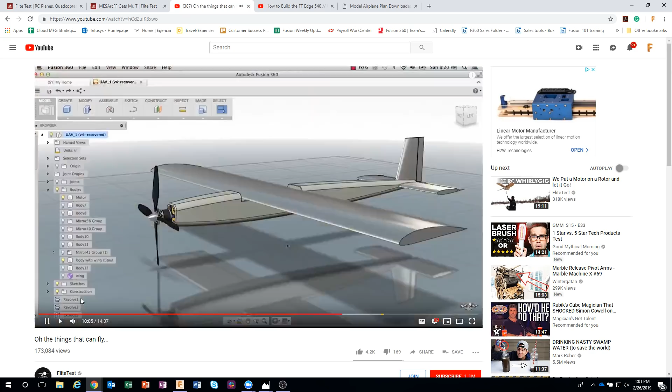I am not affiliated with FliteTest in any way, but I really do like them. I'll show a couple quick things. This is their webpage, you'll notice Flight is spelled a little differently. I've linked their webpage in the description of this video. They also use Fusion - this is Josh Bixler, and I don't know how well this is going to share, but you can see they're actually using Fusion to design some of the things and products they're creating. I think it's really cool. I've actually helped a couple of them with some of their quadcopter designs. I'm even out on one of their web pages.

I helped teach how to design stuff in CAD for one of the local high schools, and they called me Mr. T. So I'm going to scroll through here, and you can see I designed my quadcopter, which I then cut out on my CNC machine, and then flew it for them. It has FPV and a camera on it, so I was able to film their high school campus and all of the students.

Personally, I think FliteTest is a great web page, especially if you're interested in remote control stuff, because they basically try to get people involved with the cheapest amount of investment possible. In fact, a lot of their plans are made out of Dollar Tree foam board, where it basically costs $1 to cut these foam parts out.

So again, going back to this email - Bob was trying to simulate how to create these, and he sent me a link. He basically says he wants to sketch it up, fold it, print it, and then maybe make a plug out of it. I thought this was really cool, because eventually he's going to want to vacuum form a cowl. So this is what I'm hoping to show you guys today. Okay, let's dive right in.

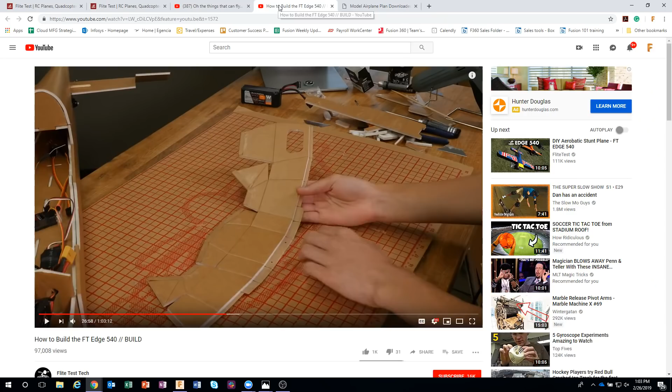If I go back to this web page, they have these build videos on how to make these, showing them cutting the part out and then folding them at certain angles. He was trying to simulate this in Fusion for his own design. You can see they're bending it and going to glue it together. Fast forwarding a bit, you can see it's going to make this particular cowl, which then slides onto the front of the airplane like so. So that's what we're going to simulate.

Okay, so I'll be honest, the first thing I wanted to do was use our sheet metal module. Unfortunately, we don't have the ability to fold along bends that you just sketch onto a sheet metal part, so I was not able to do this in sheet metal yet. I think down the road we'll see the ability to draw lines on a sheet metal part and say bend at that line. So the only thing I could think of was to actually use individual components and join them together using as-built joints. What Bob did is he got the plans and added it as a canvas.

I showed that in our last episode, episode 14, how to create a free-form handle for something like a spatula. I brought in an image, and you just go under Insert, Attached Canvas. So we did that.

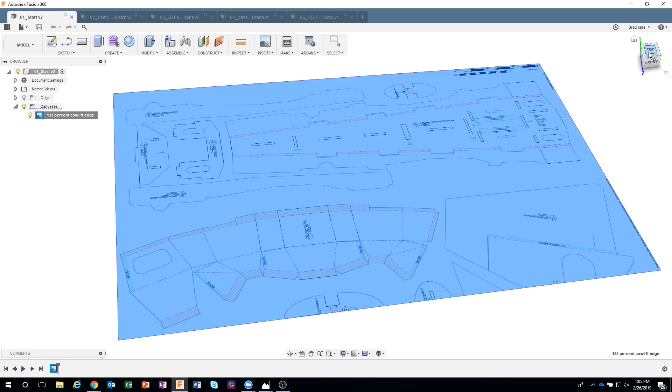Next we want to calibrate it. You'll notice in the top right of the plans there's a legend. I right-clicked on it and said Calibrate. Now all I have to do is pick two points, so I'll pick one point there and another point over here.

Now I'm going to do another shout out, this one for, I hope I'm saying the name correctly, Ayal. He said in my last live stream that when I calibrated, I just picked a small distance, and he said you'd actually be more accurate if you went from 0 to like 10 inches, or 0 to 6 inches, instead of 0 to 1 inch. You're absolutely correct, I love that kind of feedback. I was like, oh, that makes total sense.

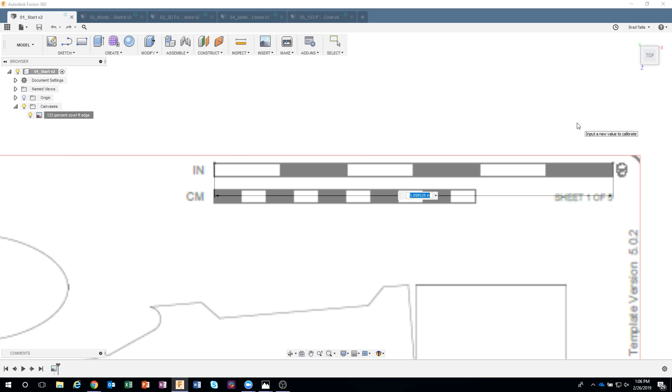So I'll do that here. I pick one point over here, another point way over here, and say that is 6 inches. You'll notice right now it says 5.8, so I'll say 6, and the image grew just slightly. Now we know we're calibrated to the right distance.

Now in this example there's a lot of repetitive stuff, so I'm going to show a couple steps and then kind of jump ahead, like the 'take the cake out of the oven' kind of shows. I'll come in here and create a sketch.

On this top face, all I need to do is zoom in and start tracing around. For example, I might start here, getting as near these intersections as I can. This is more for representation, but as I'm moving around it's saying, hey, you're parallel, automatically creating those constraints for me. I'm parallel to that other line, which is pretty cool. So I'll get near there, then come over here, just trying to get as close as I can while tracing over these plans.

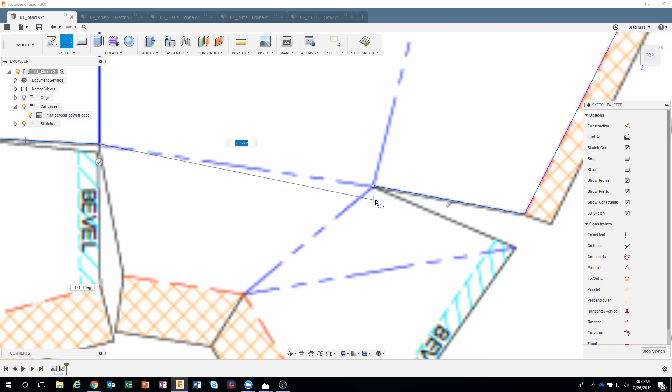So, et cetera, et cetera. I would keep going, but I'm not going to do the whole thing. I'll come down here, come over here a little bit. I recommend zooming in if you need to. The higher resolution your image is, the happier you'll be.

You can see that it filled in with this tan color, saying that's a valid profile. That's this show profile right here, and I can turn that on or off.

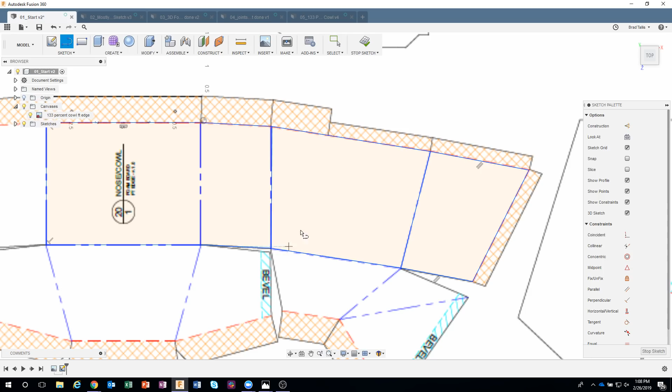The next thing I want to do is create lines that go between each of these segments. So I'll say line, and I just have to get near, and it automatically snaps to where I clicked. I'm just getting near these. The reason for that is I now have separate areas that we're going to extrude, so instead of one big solid shape, we've broken this down into a couple of quadrants, if you want to call it that.

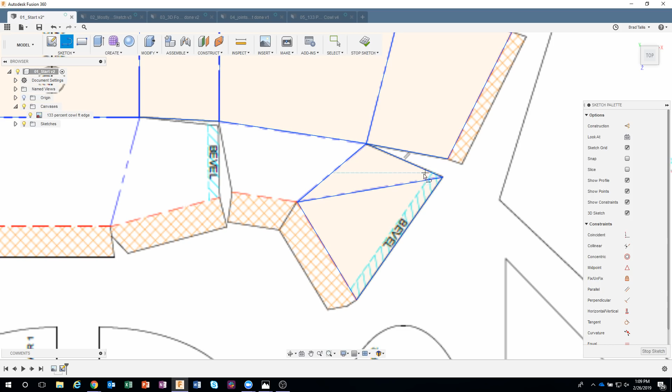Honestly, I would continue on, just keep sketching, and you can see how it catches to those areas. I'll go ahead and click, and again, I'd probably be zoomed in a little bit more, but all I have to do is trace over these areas. Now you can see I've added these two quadrants also. I would do that all the way across.

Again, to speed up time, I've kind of done that already. I've left a little area that I need to work on, so let's take a look at this. I'm going to edit this sketch and finish this up really quick.

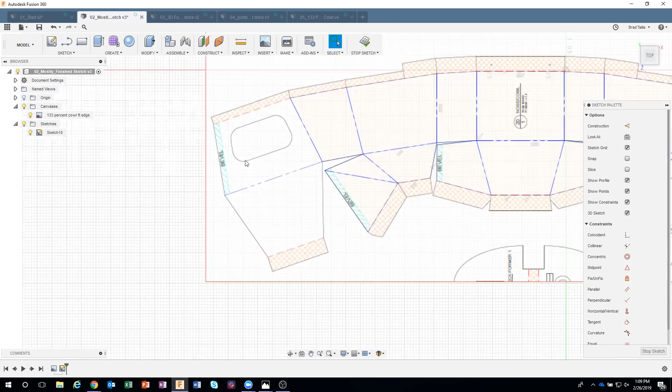I'll just grab a couple little points here, and then I'm going to show you how I'd go about doing that window that you see. So I'll go there, and finally down here. Now, here's an interesting issue that I have.

As I get near this point, you can see Fusion wanting to snap vertically, and it's not really letting me pick the point I want. That's because constraints are automatically being created. If I hold down my control key while moving, you can see it's no longer snapping to vertical. As soon as I let go, it snaps back. So if you ever want to get out of the automatic constraints, just hold down your control key.

Okay, I'll go ahead and do there, and then finally here. So how would I do this window with these curved edges and stuff like that? Well, that could be difficult. I mean, I could do arcs and all that kind of stuff, but I'm going to show you a neat little trick.

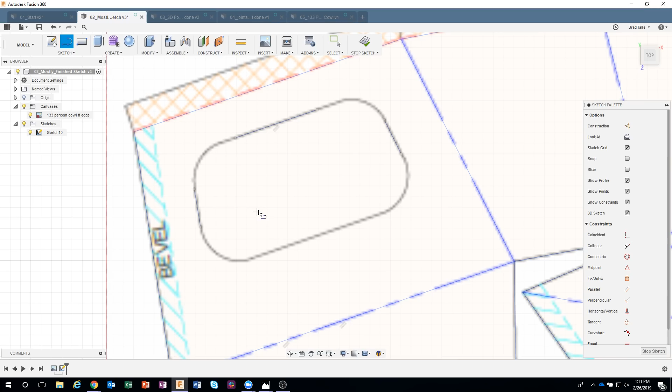I'm just going to go ahead and trace some small segments. So I'll do a line there, and I'll do a line over here somewhere, kind of like this. I'll turn off the canvas so you can see I'm just drawing a couple little line segments. So I'll do the same thing over here, tracing over the angle of this window, and then I'll finally do another one here.

And again, if I turn off my canvas, we can see what I ended up with. Now I'm going to come in here and use my extend command.

All I have to do is hover over an edge like this, and you'll see it doesn't extend all the way because it's actually lining up with other elements. But watch what happens: if I click there and then click again, you can see how it's going to the next boundary. So I'll do the same thing there. You can see how it's extending to the next boundary, which is right here.

So I can go ahead and hover over this and just do a couple quick little clicks. I notice there's a bit of a gap there, so I'll click one more time. Same thing here, I'm just going to extend these in real quick, like so. If I turn my canvas back on, we can see I now have this sharp cornered window.

And I'll go ahead and do a fillet. Now, in one of my previous live streams, I said don't use the fillet command in Sketch, use it in 3D. I could definitely do that in this case, but I am going to do a 2D fillet in this example, just because I'm probably not going to come back and change the radius of this, but I do want to show you that you can do it in 3D or in 2D.

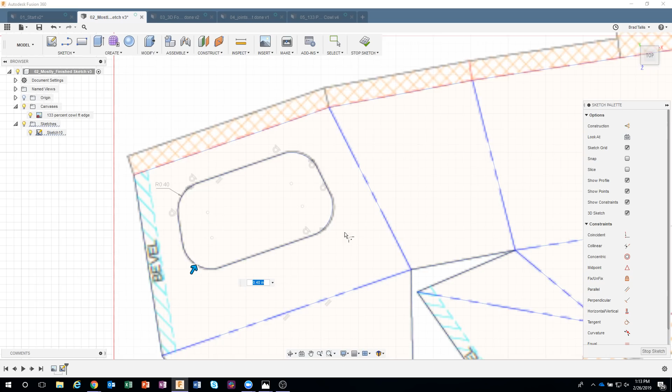And there we go. Okay, so I've now sketched all of these different areas. If I were to turn off my canvas, we can see... oops, I didn't do that last 0.4. Let me go here, say okay. So you can see we have all these different areas. And I'm going to say stop sketch.

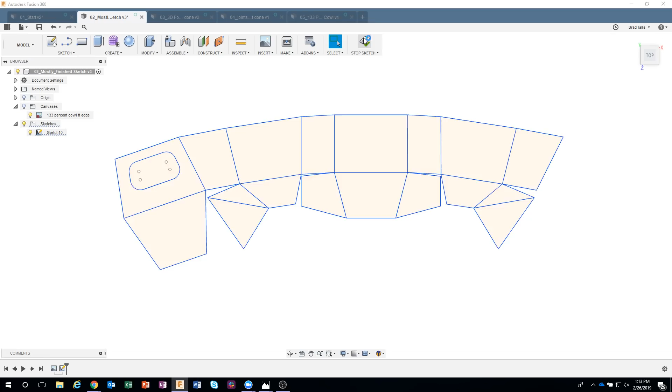Now, FliteTest uses Dollar Tree foam board, which happens to be 3/16 of an inch thick. And what I'm going to want to do is actually extrude all of these regions individually, so they're going to be individual components. So I'd have to type in 3/16 multiple times.

So this is where your parameters really come into play. I'm going to say change parameters, and I'm going to create a user parameter. We could even call it foam. It's in inches, and I want it to be 3/16.

Now, I always want it to extrude away from me, so I'm actually going to say minus 3/16, and you'll notice it figures out the value for me automatically. But basically what we're doing is creating a variable called foam, and it's going to be 3/16 of an inch thick.

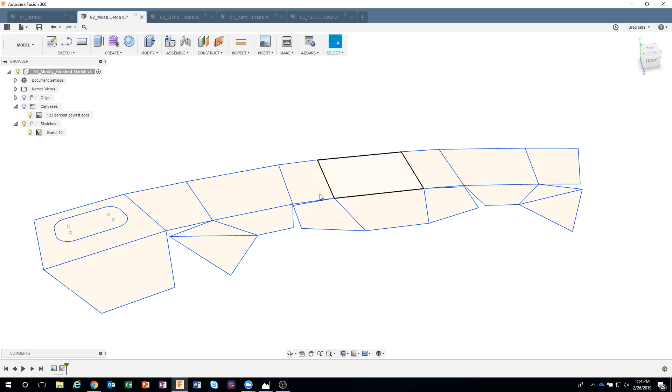So check this out. Now I can come in here and say new component. Now, why am I doing a component? Well, all of these parts are going to interact with themselves or with other parts, so I want to use the joint command, or in fact the as-built joint command, and these require them to be components. So we're going to say new component, and I'm just going to call this foam part, and I'll say okay, and I now have a component called foam part.

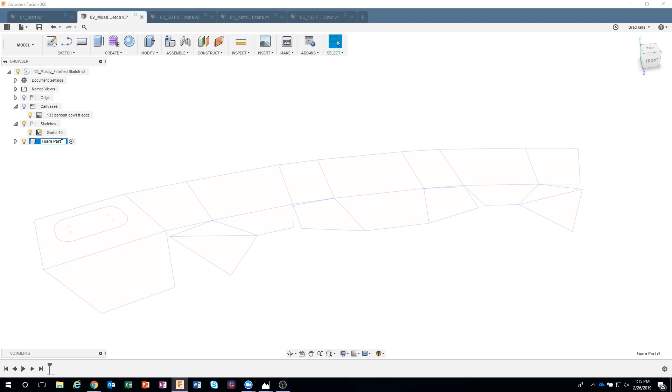Now what's going to happen is all of my parts are going to come under here. In fact, I'm going to rename that to make even more sense. I'm going to say foam part assembly. Let's do that. Okay, so now I can come in here and say extrude.

How far do I want to extrude? I want to extrude whatever the distance foam is. So you can see how I start to type in foam and it finds a user parameter called foam. And when I do that, you can see that it actually extrudes in the negative direction the thickness of foam.

What's really cool about this is, let's say you don't use Dollar Tree foam board, you actually went to Walmart or someplace like that and bought some foam from Hobby Lobby or Walmart, and maybe it's not 3/16, maybe it's like 4 millimeters or slightly different. You could just go in and change that variable and all of your parts will change thickness, and you don't have to go back and edit every single one. So that's another positive reason why you might want to use a parameter.

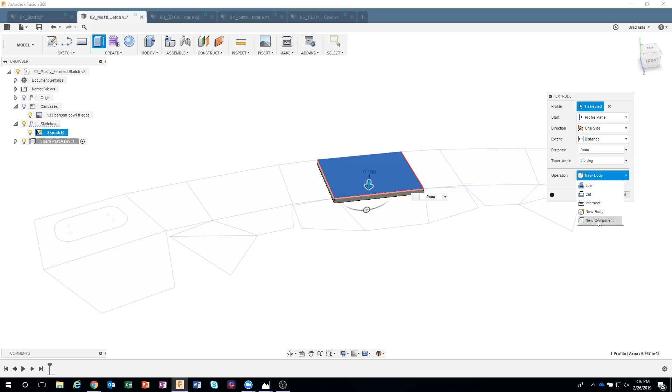Okay, now the key thing is I want to make sure I'm saying new component every time I do this. So I'm going to say new component and I'll say OK. Now you'll see a couple things happen. If I expand open my foam part assembly, there's our first component. You also notice that my sketch went away, but all I have to do is just turn it back on.

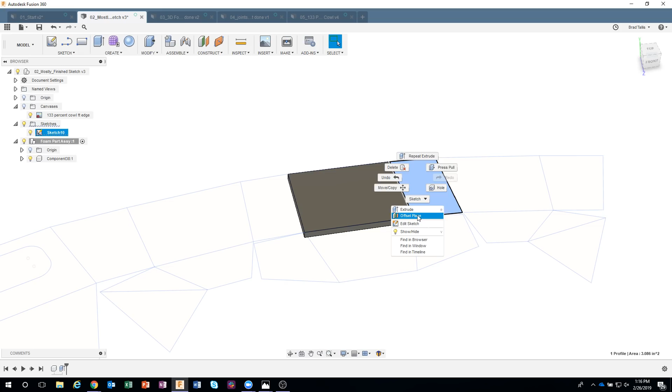Okay, so then I'm going to do the exact same thing. I'm going to right click, extrude, how far. I don't even have to type in foam. I can actually just hit this little down arrow and it remembers all of my previously entered numbers that I've done. So I'm going to say foam, new component.

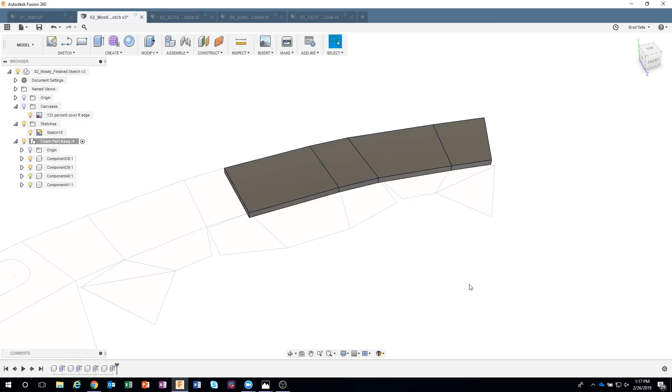I'm going to repeat my last command just by dragging straight up. How far? I'll say foam, new component. Again, kind of repetitive—I'm having to do this over and over again, but you'll notice it's creating these individual components. So distance and new component. I'll just keep working along, and I'll do maybe 2 or 3 more here, then jump ahead.

There's no way I can just select all of these. I could do maybe a couple of them, but I want them to be separate components because we're going to be rotating each one individually. So that's why I have to make these individual.

And then finally, I could do maybe this one over here, but let's go ahead and jump ahead. In fact, that's what I did—I'll go ahead and turn off my canvas. I've extruded a whole bunch of these, and we can see all the individual components in here.

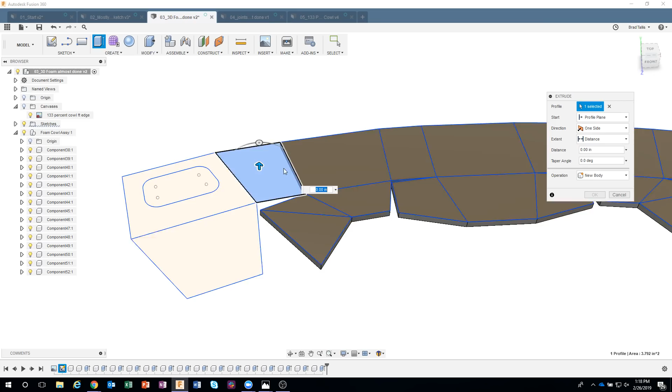Okay, so I'll just do these last 3 really quick. I'll say extrude, how far, foam, and again I want to make sure I say new component. Let me turn on my sketch.

And hopefully you know this trick—if you right mouse click, you see the marking menu and you can see this blue radar kind of moving around, and this black line. This is what we call a gesture. Basically, if I drag straight up, it's going to repeat the last command. If I were to drag to the left, it would undo. If I were to drag down, it would go into my sketch menu, etc. So all I'm doing is right-clicking and dragging straight up, and it's repeating my last command.

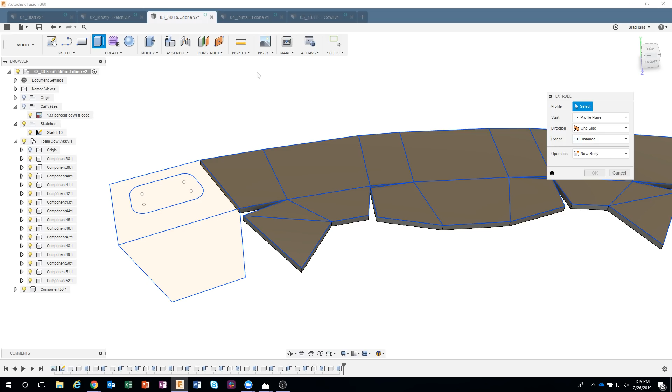Okay, so kind of a neat shortcut. I'll say new component, I'll say OK, and then finally I'll repeat one more time, and I'm going to select this outer region—you'll see it leaves the window there. We'll come in and say foam and new component.

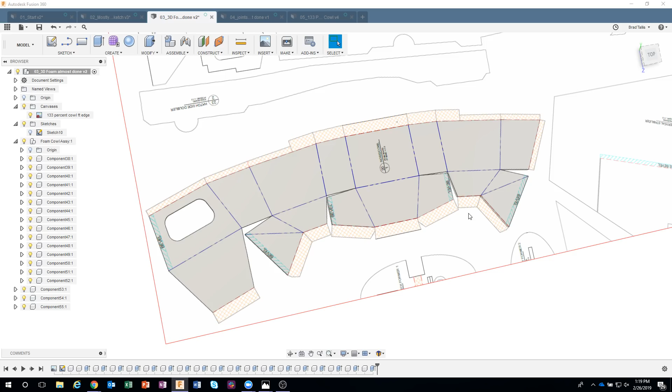Okay, so I've basically recreated what it would look like if I were to cut this out of their plans. Now, this shaded area here, this is a paper that they fold over to kind of seal the edge. We're not going to worry about any of that in this example because we just want the basic shape—I'm not going to worry about the paper part of it. Now that I have this, I want to simulate how it would fold together. And because these are components, I can use as-built joints.

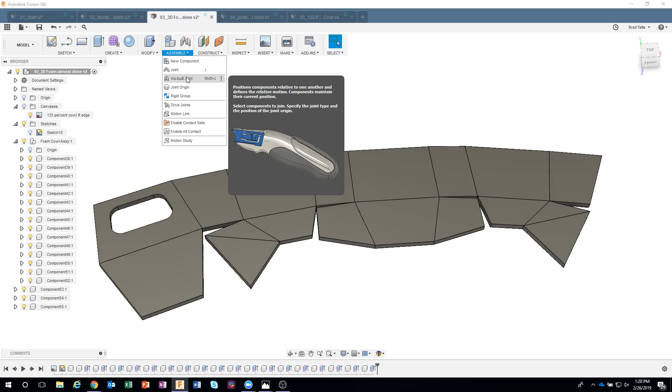Because the as-built joint allows you to take components that are already where they need to be and create a joint with them. However, the first thing we need to do is pick one of these pieces of foam that's going to be stationary. I'm going to say this is basically the bottom of the whole cowl. So I select on it, and it tells me it's this component here.

I'm going to right mouse click and say ground. You'll notice it puts the little tiny pin icon. That means I can't physically drag on this, where I can move these other ones because they're all separate components. I cannot move this one because I've grounded it. It's stationary, it's what's held in our hand or glued to the table or whatever.

So now what I want to do is create as-built joints. I'm going to come in here and say as-built joint. And what are the two components? I'm going to say this guy and this guy.

Now I want them to be able to revolve, so I'm going to say revolute. In this case, I'm going to actually pick the bottom of this edge, and I'll show you why here in just a moment. So I'm going to hover over this edge, and you see this little flag.

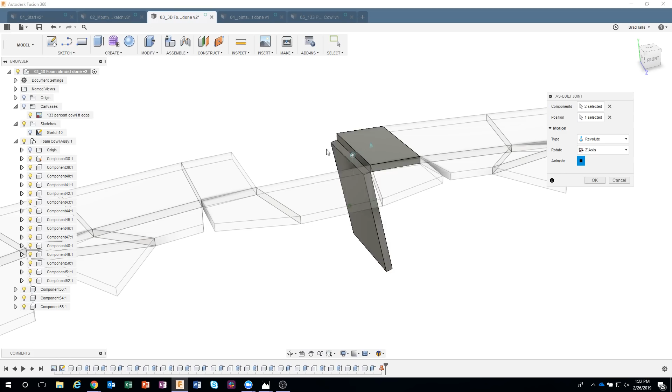Now, if I hover over faces, the flag is planar to that face. But if I hover over the edge, you can kind of see how the flag is basically rotating around that edge. So I'm just going to click there, and we can see how that would rotate. Again, it's not the best example because we've grounded this part, but it was kind of the order that I picked it. But you can see how it's going to revolve around that edge.

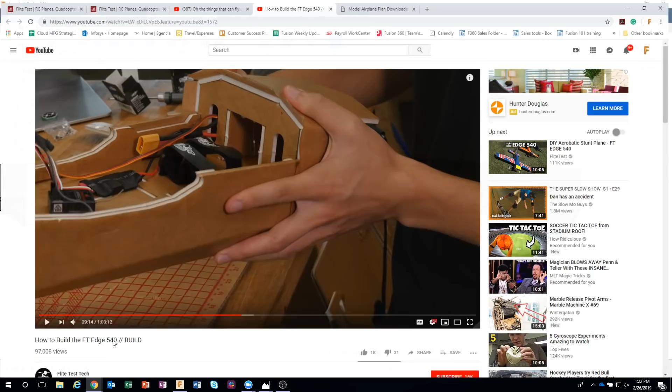Now, the reason I picked this bottom edge is because they're basically crushing the foam. It's kind of hard to explain, but if you watch the video, they're actually coming in and scoring the foam, and that kind of crushes it and allows it to fold in on itself. So we're sort of simulating that in this example.

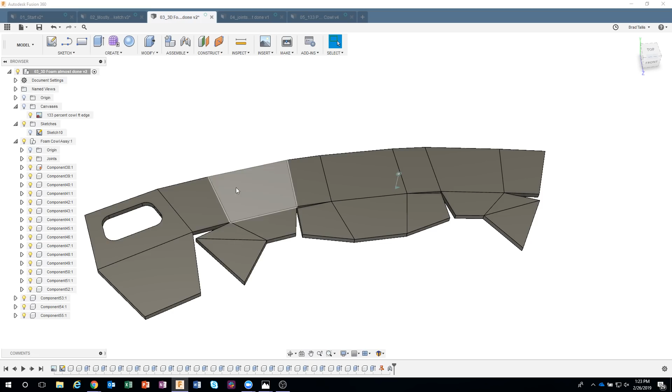Now, I glanced over at the chat. I see a lot of messages, and somebody said some of these parts are the exact mirror—couldn't you have just drawn half of them and mirrored them across? Actually, a very good observation. I tried that at first, and believe it or not, it is not an exact mirror. They look like they are, but when I went to fold it together, it didn't quite fold correctly. So I ended up tracing over the whole thing. But in a situation where it is symmetrical, absolutely, I would have only drawn maybe this whole section over here and then mirrored it over to here and then maybe added this last section. So yes, great observation.

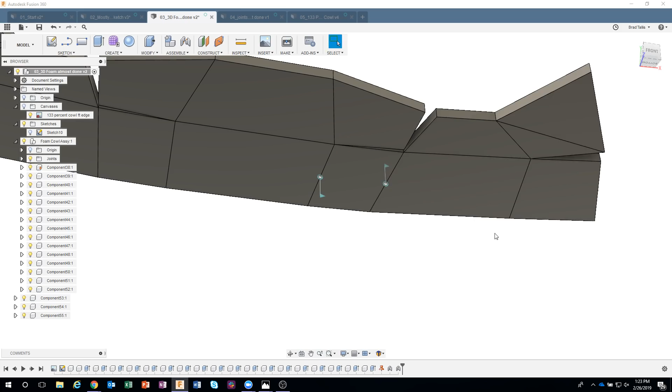Okay, so I just created a revolute joint right there, and basically we're just going to do that over and over again. So I'm going to say as-built joint here and here, and I'll pick this bottom edge. Say okay, and I'm just going to keep working along, picking the exact same edges. So I've done these guys. Let's do maybe this guy and this guy, and I'm going to revolve around this edge. I'll do just a couple more.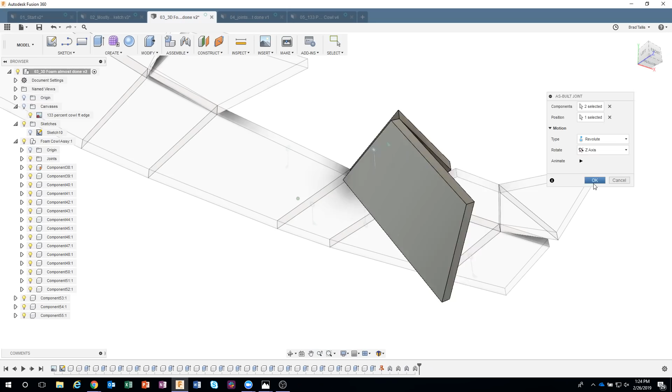Again, hopefully it makes sense why I'm picking the bottom, because we're basically going to crush the foam. So I'm just going to do that guy, say okay. And then I'll do these so you can kind of see how they interact with each other. It's kind of cool. I'll do that guy, and then finally I'll do this guy here.

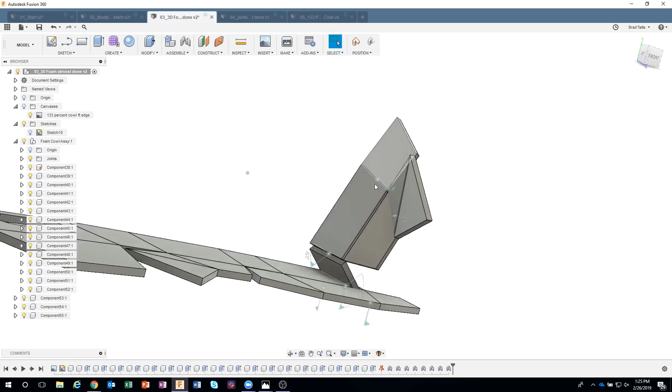And again, I would do that all the way across. But this allows us to grab that guy there, and you can see how we can change the angle of this. Now we're going to be much more precise—we're going to actually type in our angles. But you can kind of see how these all interact with each other. If I grab that one, it's trying to do all of them. So I apologize, but we're basically going to come in and fold this.

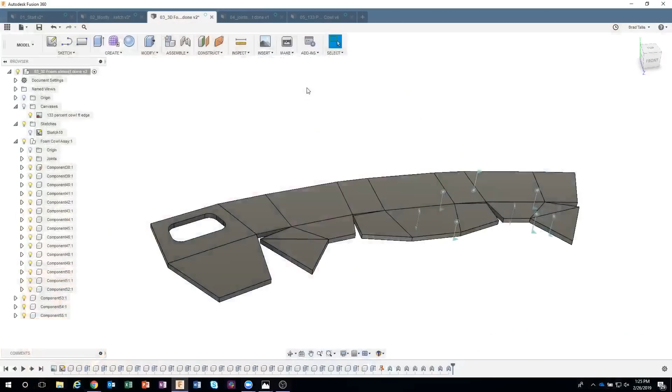I'm doing the cake in the oven here, showing a couple steps and then jumping ahead. I've already done a bunch of those steps because I don't want you to just sit here and watch me click 20 or 30 times repeating the same command. So no magic or smoke and mirrors here. Let me see how far I can go, I'll do this one. Let me just finish this up really quick.

As-built joints, I need to do these guys. Let me rotate so I can make sure I'm grabbing the correct edge. Bear with me... okay, this guy and this guy.

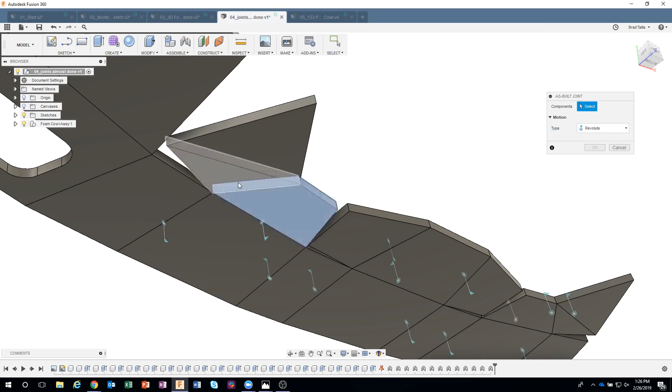Now you might notice some of the flags are pointing up and some are pointing down. It really depends on which edge I'm selecting, and it doesn't matter if it's pointing up or down, but when you start typing in some of the dimensions, it's going to go positive or negative. That's kind of what the flags are showing.

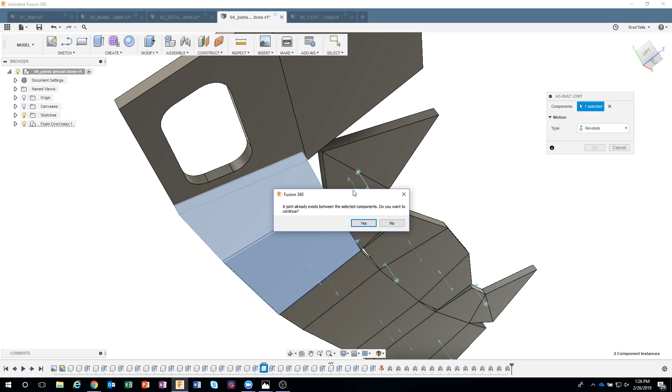I already had a joint there, so let me... yep, there it is. This guy and this guy, and then finally this and this. Okay, so there we go, I've added joints on all of those components, so you can kind of see all of those components. I would go ahead and save, obviously, because I've just done a bunch of stuff.

But now what's kind of cool is I can come in and use the drive joints command. Remember, this guy is grounded right here, we can't move him, but the other ones we can. So I'm going to come in and say drive joints, select on this joint right here, and when I start to drag you can see how it's going to move all of those parts at the same time, which is kind of handy.

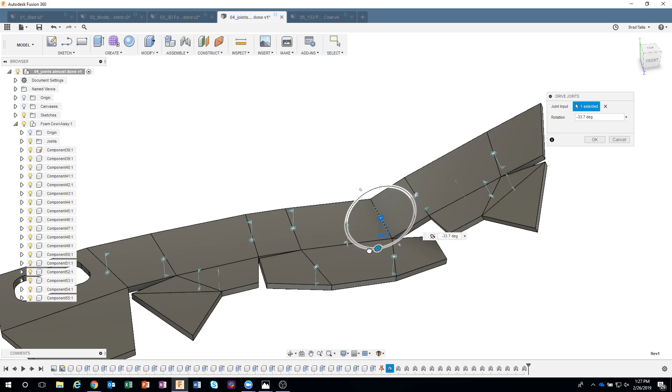Which is pretty much how building the foam part works. So I'm going to come in here and say minus 30 in this case, and I'll do the exact same thing over here, rotate this guy, and it needs to go 30. Again, I'm getting these numbers from the actual assemble video - he talks about how to bend these and what angle to bend them at.

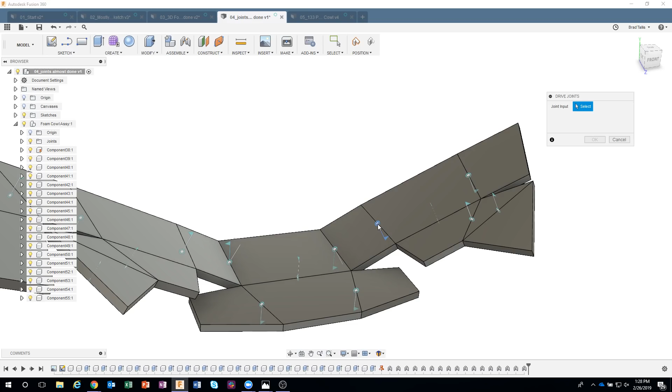So again, I'll do drive joints, I'll grab this guy, and it needs to go 60 degrees. You can kind of see I could rotate dynamically, drag, and see it sort of snap from just random numbers to like 45 there, and I'll keep going and it's going to snap to 60 for me. Or I could type it in.

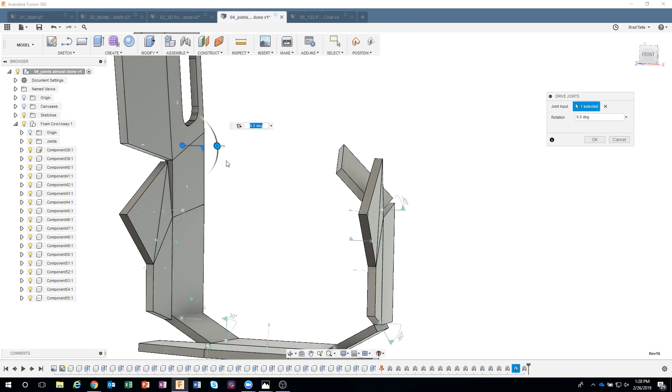So I'll do the same thing over here, we'll say 60. And I'm just going to kind of keep going along. I think this one here is 45, so I'm going to say minus 45. And this guy here - oops, wrong one, let me do that guy there - is 45.

And then finally this one here, I'll go ahead and rotate, and you can kind of see how we can visually see how these are all going to interact with each other. So I can see, probably around, let's try minus 45 - that's a little bit far or whatever, but that's okay, I'm going to leave it the way it is. And I might have to come in and edit this guy, so I'll double click on him and I can rotate this down if need be.

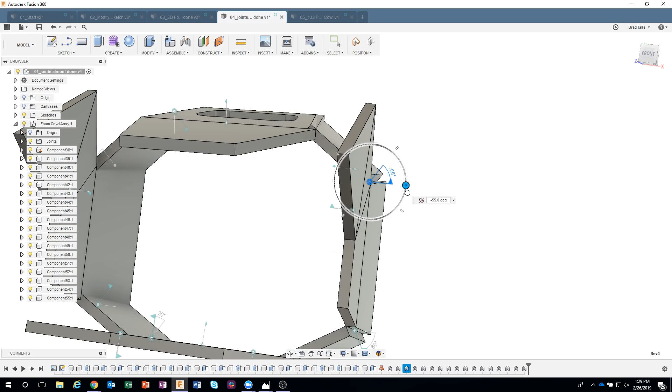Now again, you're going to see that some of these parts intersect, and that's because they bevel the edge. In fact, if I turn on my canvas, you'll see some of these are marked bevel and all kind of stuff. I'm not going to go into that much detail because that would just take a lot of time, and it's not necessary for what we're trying to do.

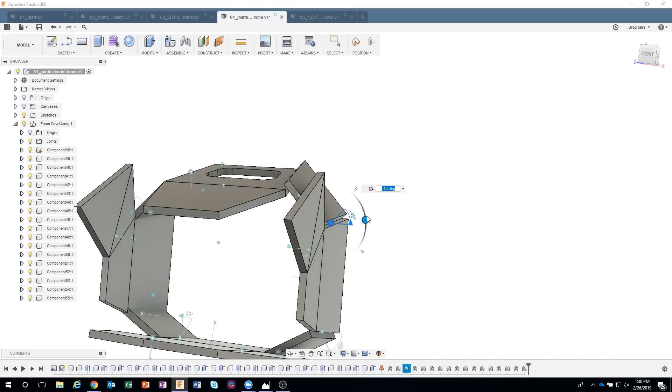I'm not going to spoil the thunder here, but we're actually going to assemble this and then use this to create an organic cowling that we could 3D print or injection mold or something like that. Now, if I wanted to, I could maybe subtract these from each other to get that final shape, but I'm not going to in this case.

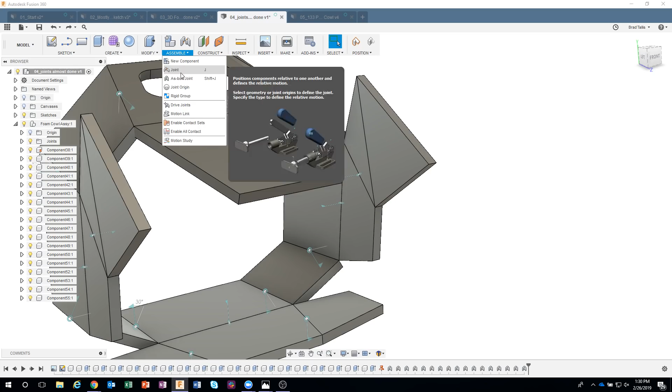Oops, I did not mean to do that. Okay, so let's go ahead and continue on with some of these other ones. Sorry, I didn't mean to redo my undo. I'm going to come in here and say drive joints, we'll grab this guy here, and let's rotate about 45 degrees in this case.

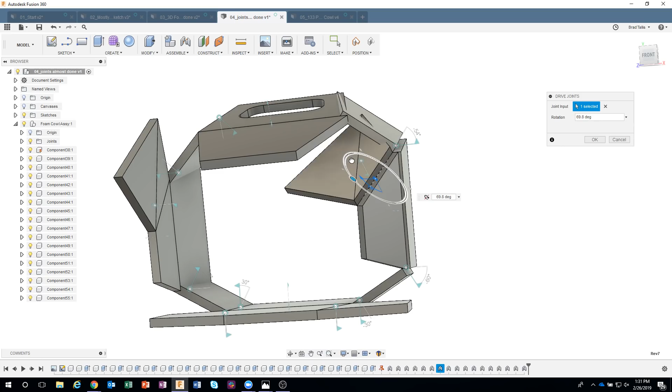And this guy here, I don't know all of these numbers, but I think maybe it's 30 and all that kind of stuff. So I'm having to play a little bit. Let's come in here and change that to come back a little bit, so you can kind of see how these all line up with each other. I'm just going to do a couple more and then we'll jump ahead.

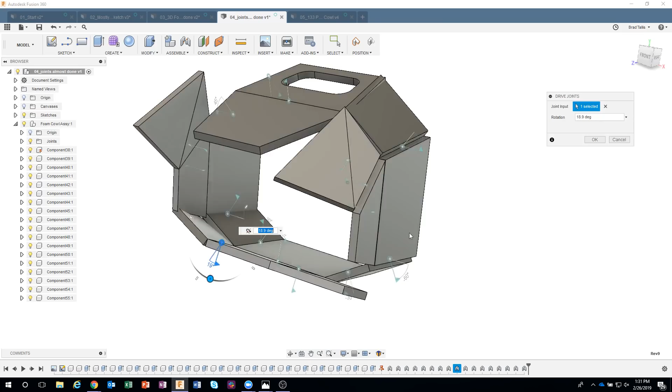So I'll come in here and say drive joints. Let's do maybe this guy here and make that 15 in this case. And this guy here, I can rotate that up until it kind of joins up or whatever. Okay, so that's almost 19, so let's just say 19 degrees in this case. And I would do the same thing on the other side.

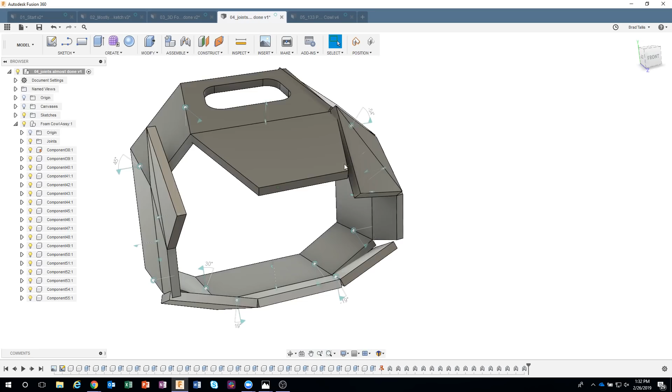Okay, so I come here and say 19 and fold these in. Again, I'm going to jump ahead so you can kind of see here's what the final shape kind of looks like, and you can see it's pretty close. A little bit of overlapping, but they bevel these edges, they're going to bevel some of these edges here. But we can actually see all of these joints. So 45, this one here was actually 53 to make it work, 11 degrees, etc. Here's kind of that final shape.

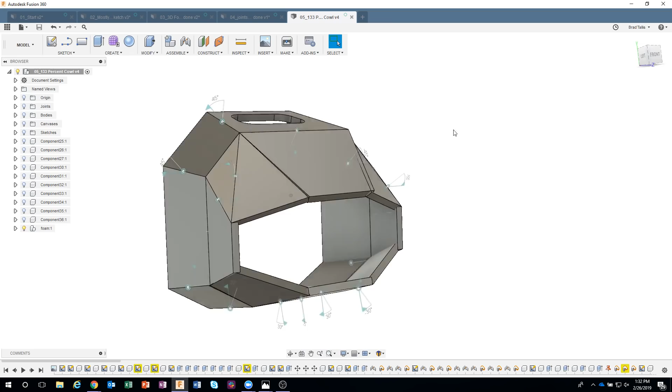And we were able to do this by just using flat components. Coming back to here, we just basically drew them flat, added the joints, and then folded them up into place. So now we kind of know what the overall shape is going to look like. In fact, if I wanted to create a 3D model of the whole airplane, I could kind of mock it up with the foam. But what I want to show now is, I have a 3D printer. I want to create, instead of a foam cowl, maybe a 3D printed organic looking cowl to allow it to fly through the air better. And maybe if it breaks, I can print a new one.

So I'm going to show some neat tips. Now this is a little bit different than just how to rotate parts into place. We're kind of combining multiple technologies here.

So I'm actually going to use the free form design. I'm going to say create form, and let me turn off that guy. Sorry, I already created one in here. So yeah, let me do this really quick.

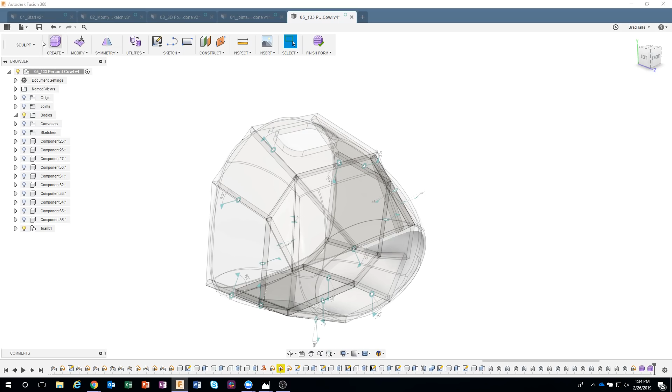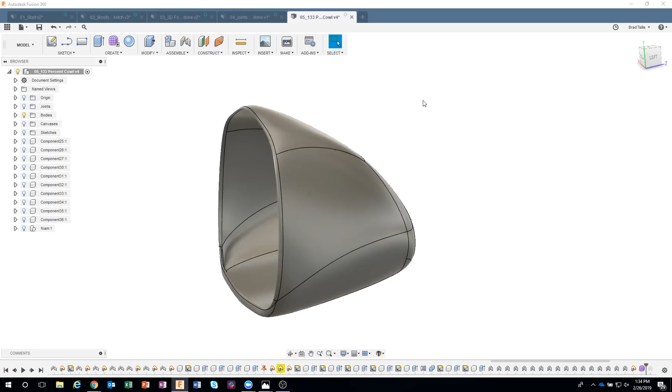I'm going to undo back a couple steps. I'll show you the final product here. So this is what we are going to create, is this something that looks like this? Okay, now you're like, wow, how long did that take? Hopefully you'll be blown away on how easy it is to do something like this.

Okay, so I'm actually going to delete that out of my history tree or my timeline. We'll turn on our foam here, and I'm going to say create form. Now, to me, this looks pretty spherical, cylindrical, but almost more like a sphere. So I'm going to come in here, and you'll notice we have sphere, and we also have quad ball. And I really like quad ball because it kind of breaks the faces evenly across the top, front, right, etc. of a sphere, where this one is more kind of like latitude and longitude.

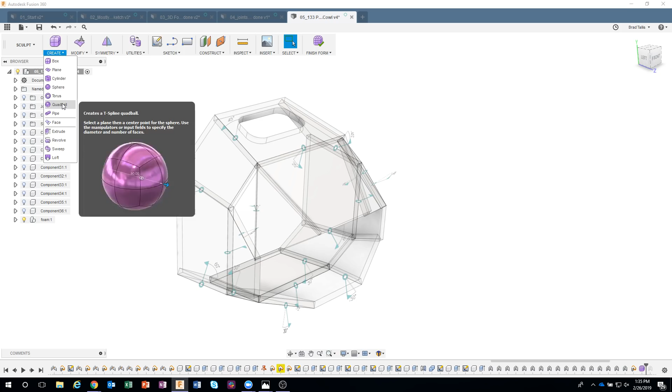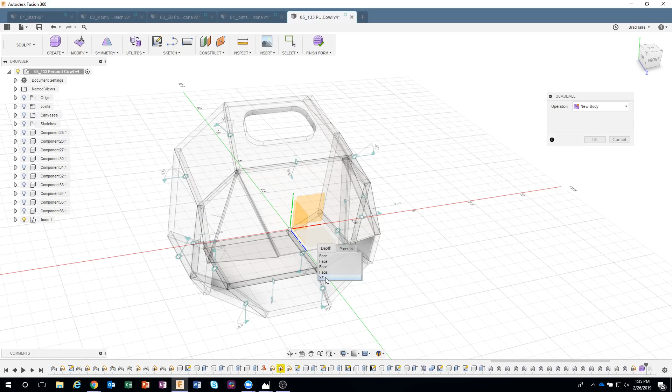So I'm going to come in here and say quad ball. I'll just go ahead and draw it. Actually, let me turn on my origin. I'm going to go ahead and, sorry, clicked too many times. Quad ball, I want to put it on this plane right here. So I'm going to click on that plane and make sure I'm selecting it. Otherwise, you can see it's going to try and snap to other faces and all that kind of stuff. So I'm going to say that plane there.

And let's just do something that fully encompasses it like so. Okay, kind of covers the whole thing. So you can kind of see as I was dragging that, I can still see my foam, but I'm going to kind of just make sure I'm going past my foam a little bit, like so. Okay.

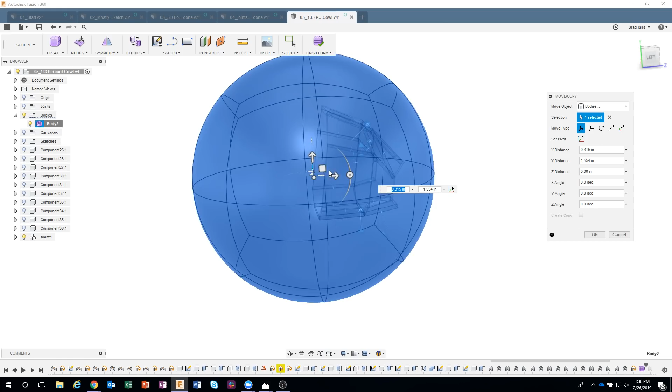Now it's kind of hard to see what's going on, so I might come in here and change my opacity control. Let's just do maybe 80%. And I'll go ahead and move this so it's more centered, like so. Okay, something like that.

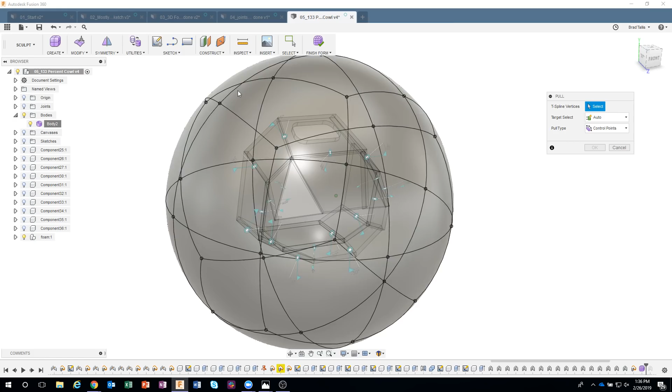Now there's a really cool command in here called pull. What this does is it actually moves the vertices to the closest 3D model. So I'm going to say pull, and you see all of these vertices highlight. I'm going to draw a box around the whole thing, and you can see it snap down. Let me do surface points first. You can see how it took that sphere and brought it to the underlying shape as good as it could. You'll notice some weird oddities, but it's a really cool command.

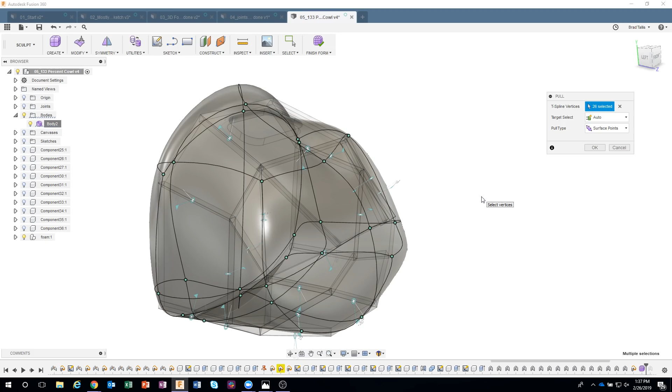A prime example: let's say you're designing a shoe and you have what the inside of the shoe looks like. You can just draw a cylinder and snap it, or pull it, to the shape of that foot, and it's going to match that. You can see it's keeping G2 continuities, trying to keep this as organic looking as possible.

Now, unfortunately, I didn't get the best result that I wanted, but there's some options in here. The pull type says surface points or control points. I'm going to change this to control points, and you see I get a much smoother result. It's almost like using control splines. You can see it's kind of on the inside, but that's okay. It's using our 3D model to generate what this shape is going to look like.

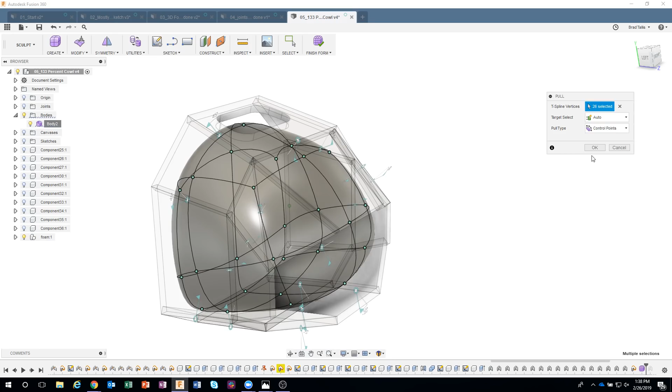Okay, so I'm going to go ahead and say okay. And I'm going to edit this guy, and let's just scale him up. I'm going to scale him in all three directions until he encompasses the whole thing. Okay.

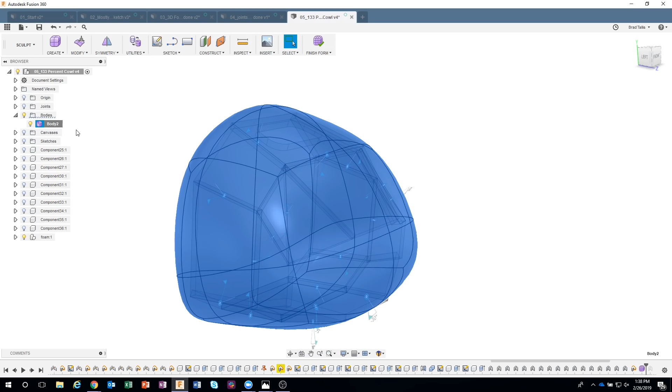Now, I'll go ahead and turn off the foam, and you can see our shape that we have. Now, I need air to be able to come in, so I'm going to click on these two faces, and I'm going to say subdivide. What that did was it basically added some more geometry there. It's kind of hard to see, but it took one face and broke it down into 4. Now I can come in and say, you know what, let's delete those two faces.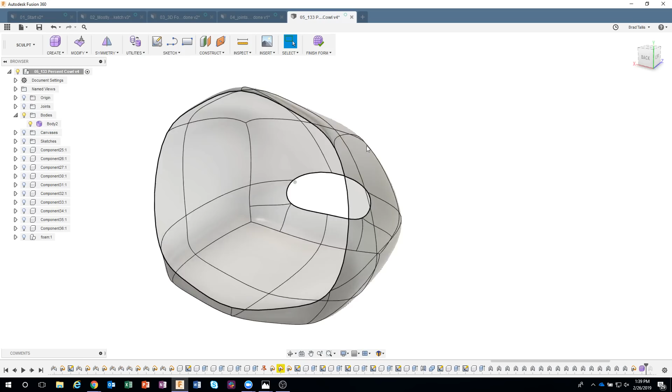And now we're looking into, it's no longer a watertight model. In fact, I want the back to be open also, so I'm going to go ahead and delete those faces. Okay, I could turn on my foam again to help me with my reference.

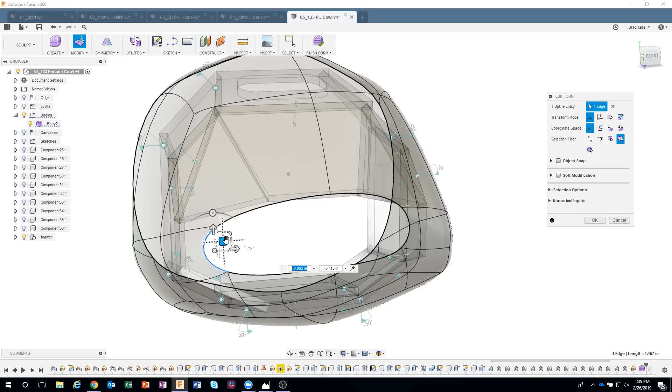And maybe we grab this edge, and let's just slide him over. Not scale, I'll slide him over, so I can bring him over a little bit. You'll notice it's only happening on one side, but that's okay, we're going to do something cool here in just a moment. But now we can kind of see what this looks like.

Now I'm going to turn opacity back to 100 so we can see what this thing looks like. There's also a really cool command in here called symmetry, and I can pick two faces, and if it can, it will make it symmetric.

So notice how this line's kind of crooked. You'll notice how I moved this edge over here, so the mouth is wider over here. All I have to do is select two faces that look sort of symmetric and watch what happens. It makes the part totally symmetric, and now you can see the cowling is open on both sides.

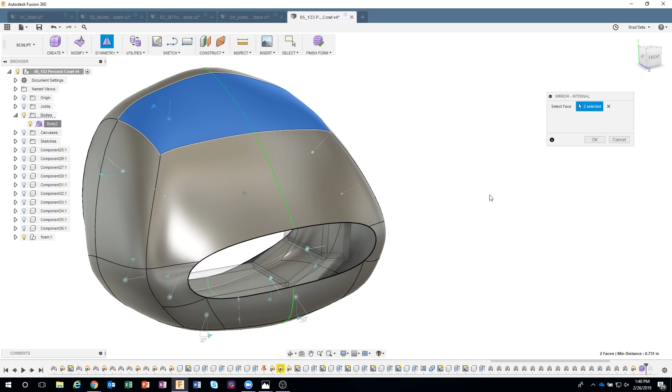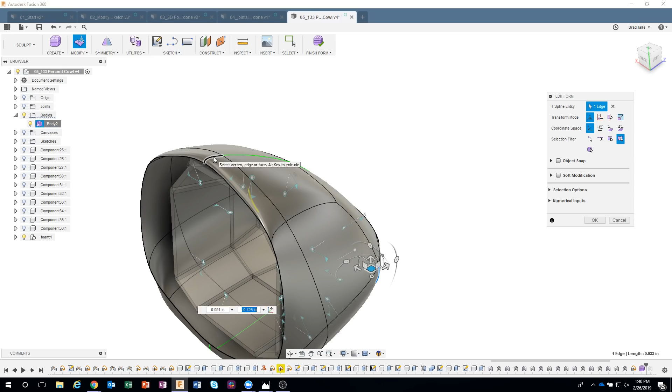And if I were to make a change on one of these, so I'll say edit, we can see how it would change on both sides. Okay, maybe we grab this edge and push him in slightly to change that. It's kind of pointed right up here, so let's just bring this down a little bit, like so.

Same thing with, maybe I'm just going to delete that edge, hopefully. I'll say delete, and we've opened up the back of the cowling.

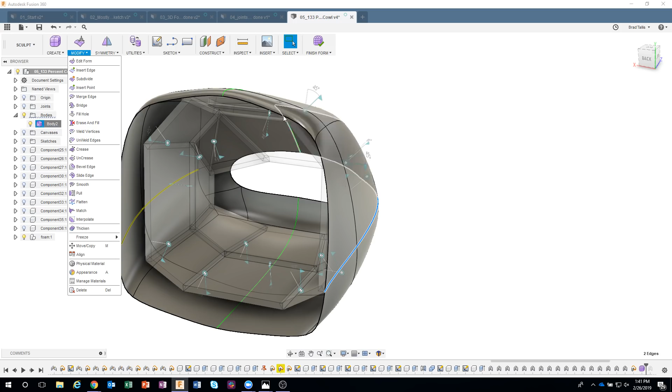Okay, and I can see my underlying shape here, so I can come in and just basically tweak with this cowling until I get it kind of the way I want it to look. Maybe I'll grab those two points, tuck them in a little bit more, like so. There's even another command I'm not going to show here called match, where I could match my freeform to an existing sketch shape. If I knew the exact shape of the back, I could match this to it, but that's for an upcoming live stream. Let's take a look at this. Maybe we bring this guy back slightly, rotate it a little bit, so I have a lot of control over what I want this to look like.

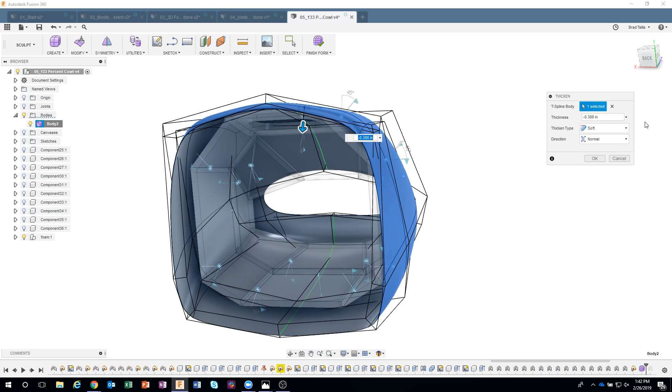When I'm all said and done, I can go ahead and thicken this. This is the final shape I want it to look like. I'll come in here and say thicken. What's the T-spline body? I just select on it, and I can extrude or thicken outward or inward. In this case, I'm going to go in a little bit, maybe 0.1 inches. You also have different thicken types: sharp, soft, or no edge. I'm going to do sharp in this case and say OK. If I turn off this guy, you can see that it created a very sharp edge, which is pretty cool.

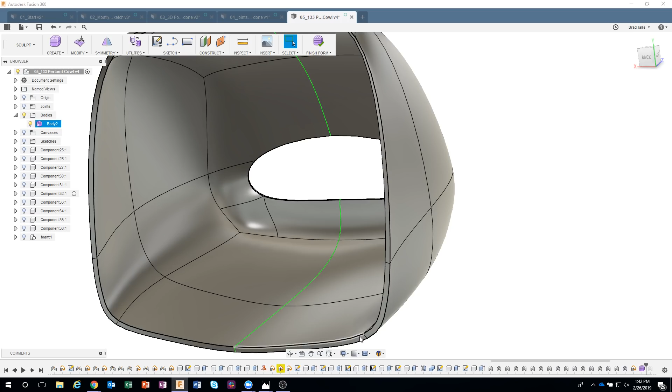Or, let me turn that off again, come in and say thicken, but instead of sharp, I'm going to say soft. What it's going to do is create a nice soft edge, kind of rounds things over. So you'll see, instead of a flat edge, it creates a soft round edge.

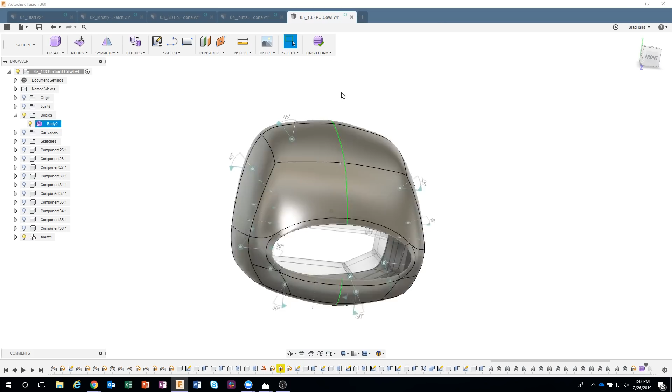Now I'm going to turn on our foam so we can see how we used that shape to create this cowl. Again, I would spend more time making sure it matched the rest of the airplane, which I don't have modeled. I know that was going from A to Z really quickly, but what I wanted to show was a bunch of different things. We brought in a canvas, we were able to use that canvas to sketch on and get our sketches the way we wanted, then we used a parameter called foam and basically said extrude all of these to whatever foam is.

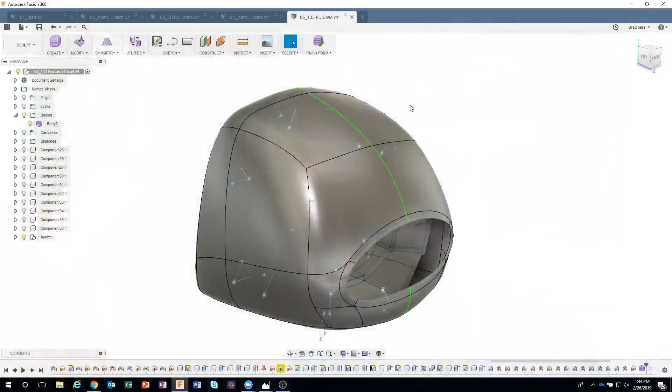Check this out. If I come back in here and say change parameters, instead of 3/16, it's going to be a 1/4 inch. Oops, I said 25 inches — well, you get the point, it actually extruded it 25 inches. I meant to say 0.25. So instead of 3/16, let's go 3/16, and then let's go 1/4, 0.25. You can see how that changed the thickness. Let's make it obvious, let's change it to 1. And there you go, all of my foam pieces thickened at the same time, and I didn't have to go in and edit every single extrude, which would have taken quite some time.

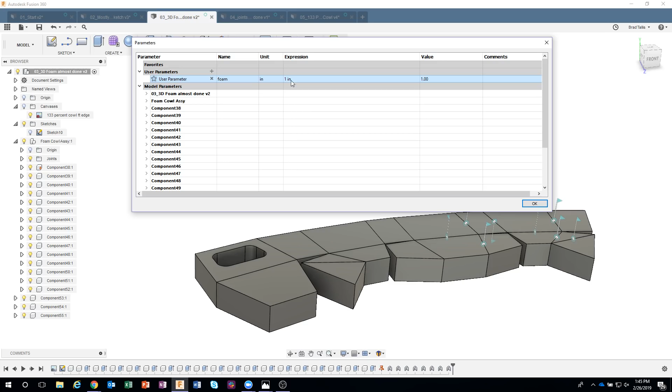So again, that's where the expressions or parameters really come into play. We did parameters, then we did as-built joints. Because all of those parts were where they needed to be, I was able to say these two parts, let's put a rotational joint, and we were able to rotate them. Then we used the drive joint command to rotate at 30 degrees, rotate at 45 degrees, and we're able to simulate how to fold that whole thing together. Once it was assembled, we were then able to use that to create a free-form organic shape.